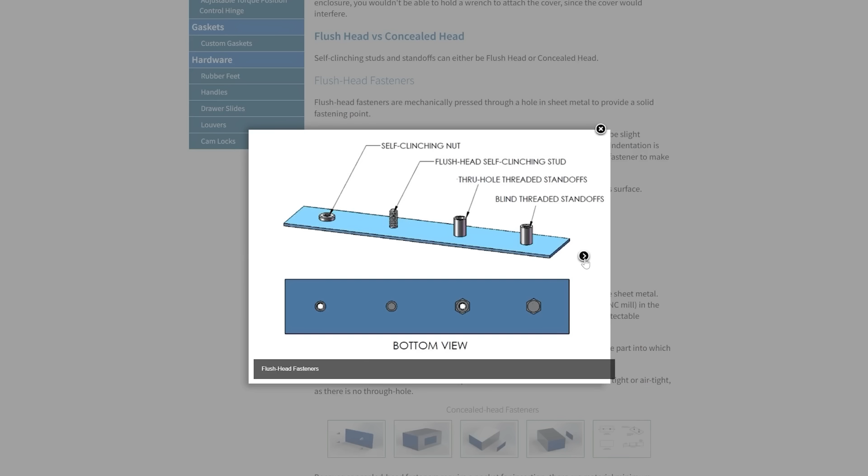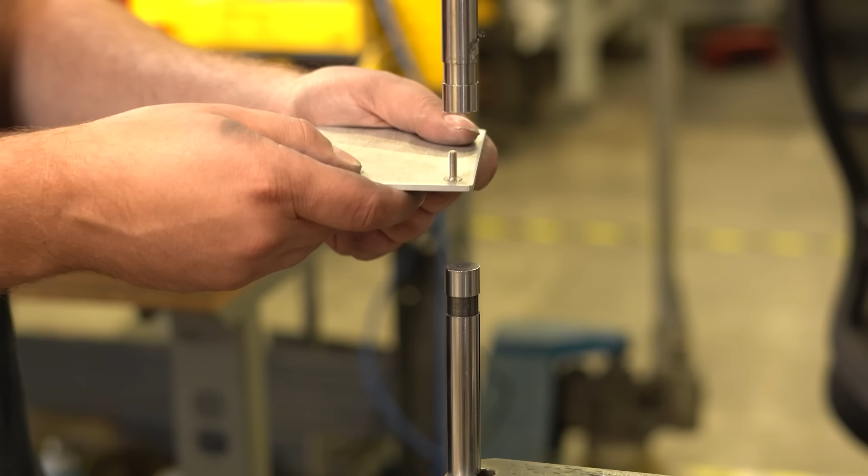So self-clinching fasteners are threaded nuts, studs, or standoffs that are mechanically pressed into sheet metal to provide solid fastening points. And these self-clinching studs and standoffs can either be flush head or concealed head. Now with concealed head fasteners, we press them into a little pocket that we've already milled out in the sheet metal. Since this fastening point doesn't go all the way through, you can't see it at all from the outside.

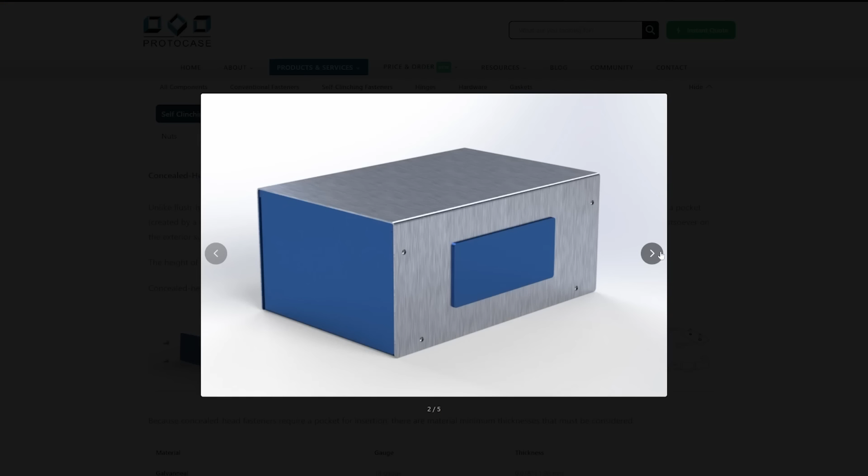It's completely hidden. Now when it comes to measuring their height, you'll measure from the inside surface of the part where the fastener is pressed in. So concealed head fasteners are a fantastic choice for enclosures that need to be watertight or even airtight. And the reason for this is pretty simple.

There's no through hole. Their concealed design protects the fasteners from external elements like moisture and debris, enhancing durability and reducing maintenance needs. By using concealed head fasteners, you're essentially eliminating potential leak points. Because there aren't any holes on the exterior, there are fewer places for water or debris to get in. Now, this is great because you can focus on sealing the main surface instead of worrying about every individual fastener head.

Another significant benefit is that with no visible screw heads on outer panels, you get a smooth, uninterrupted surface. This is especially advantageous for applying powder coating or graphics. Now, to reap these benefits, thoughtful design is crucial from the very beginning. First, you're going to want to think about assembly access. If fasteners are installed from the inside, make sure that there's enough room for the tools and clearance of the assembly. And don't forget serviceability too, especially for enclosures that may need to be opened and sealed again later.

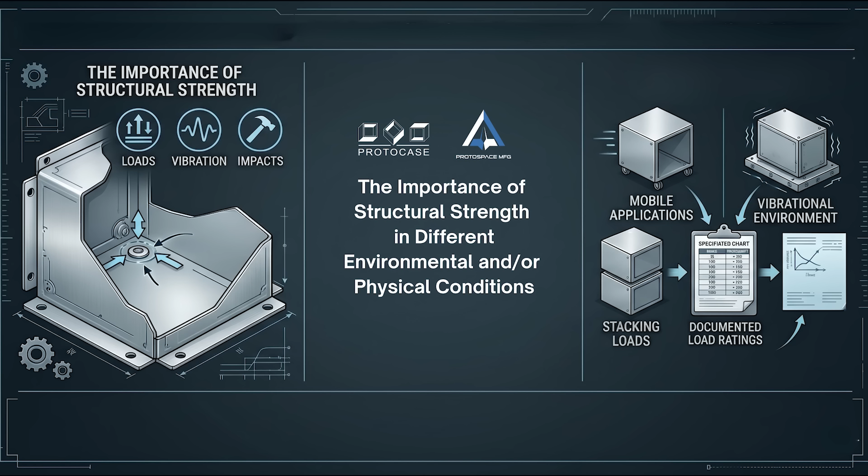Next, structural strength matters too. Fasteners need to handle loads, vibrations, and impacts without compromising any rigidity. For enclosures that will be moved, stacked, or subjected to any vibration, select fasteners with documented load ratings and verify those ratings against your expected service conditions.

Then there's precision. The blind hole needs to be milled to a very specific depth. If you don't go deep enough, the fastener head won't sit flush with the inside of the sheet. But if you go too deep, the material on the outside gets dangerously thin. That weakens the whole structure, and the fastener could even punch right through under pressure. So getting it right, it's essential.

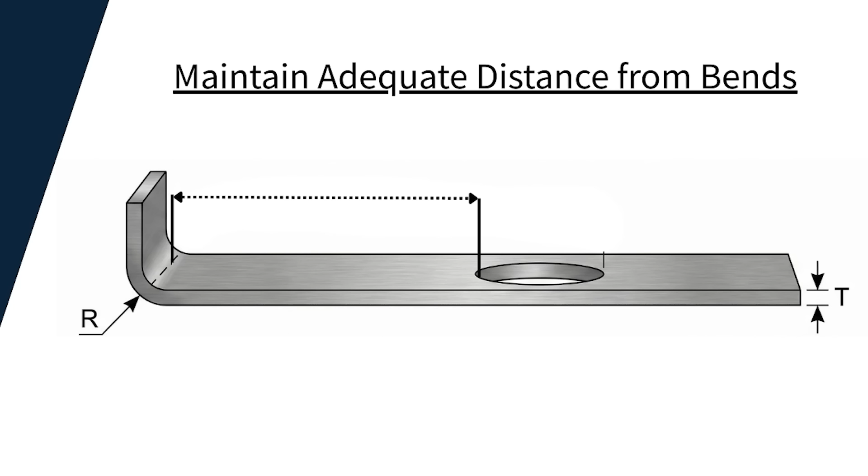When it comes to fastener placement, function comes before form. While you want it to look great, the priority should always be structural integrity. If you space them unevenly, you'll get localized compression, and that's just asking for leaks under pressure or when temperatures are going to change.

Now, because concealed head fasteners need a pocket to be inserted in, you have to consider the minimum thickness of the material. We do have some recommended minimum thicknesses here at Protocase and Protospace MFG. You're going to want to check out the following chart for our stock materials and their appropriate minimum thicknesses. Now, having said that, it is good to know that we can go with even thinner material thicknesses if needed, but our team will advise you on the best approach when you work with us.

So you're going to want to remember to think about your fastener strategy very early in the design process. This will help you create enclosures that not only hold up better in the real world, but also require less maintenance over their lifetime. And if you are looking for airtight enclosures, concealed head fasteners are going to be a great choice.